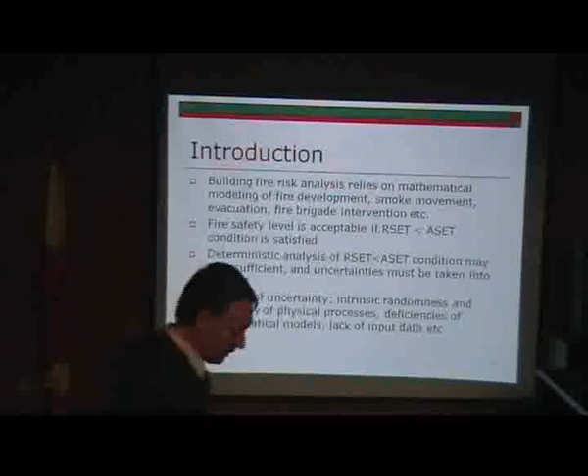...is less than the available safe egress time. That is the time before the exits will be blocked by, say, toxic products or high temperature or things like this. So this condition, RSET less than ASET,

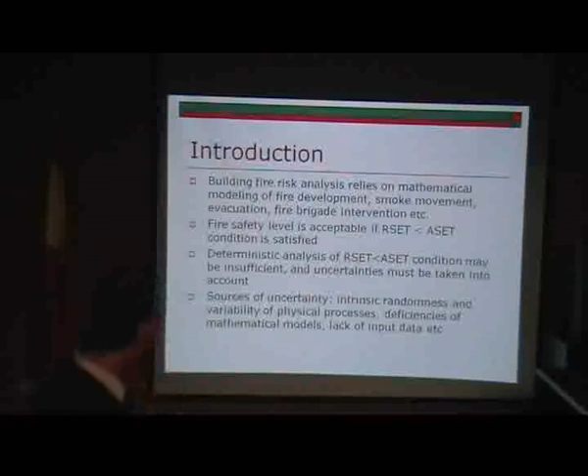is a general condition, and I'll say a couple of words about motivation for this research. All the world now is moving from prescriptive rules or codes for buildings in terms of fire safety to performance-based design, which is a design of buildings based on their performance in fire conditions.

And Russia, well, with some delay, starts to catch up, also introducing new laws which make building designers prove that the building they're designing is okay in terms of this condition. But it's a very inertial process of making people think differently.

And the question which we often ask is, okay, you show this in one particular situation, which you consider as the worst case scenario, but what happens if the situation changes, if you have a different fire source or different geometry and things like this? So, as a first step of all uncertainty analysis, we need a sensitivity analysis.

And I've done this with the CFAST model for different situations. I thought it would maybe be of general interest to see how different parameters affect the result we obtain.

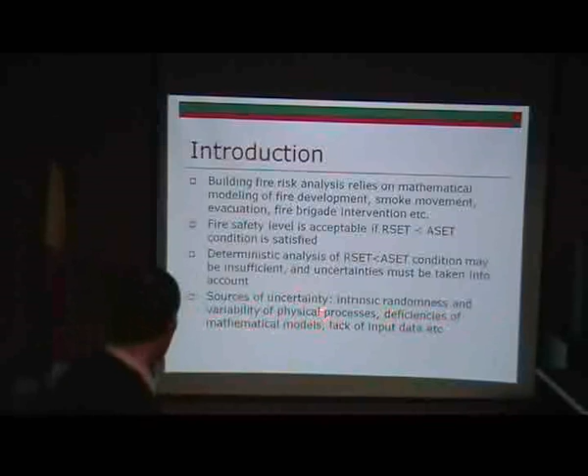We can perform deterministic analysis of this condition, but this can be insufficient, and uncertainties in the determination of the time that people are evacuating and the time available before untenable conditions are reached in a compartment should be supplemented by the analysis of all uncertainties. The sources of such uncertainties are intrinsic randomness and variability in physical processes. Fire is a random event. Then deficiencies in our mathematical models, lack of input data, and so on.

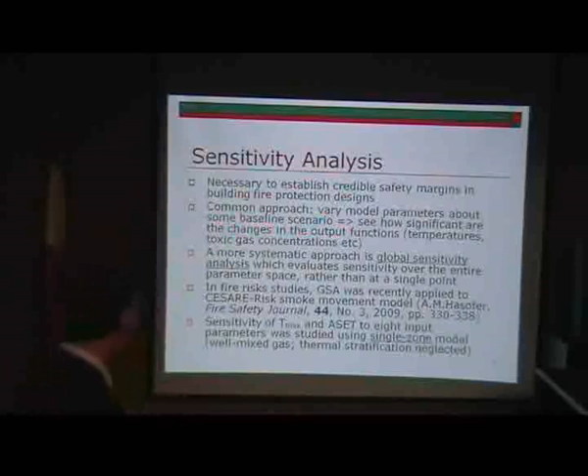So uncertainty analysis is necessary to establish some credible safety margins, and sensitivity analysis is its part. The common approach is we vary several model parameters about some baseline scenario and see how significant the changes in the output functions are. And these output functions can be, for fire modeling, temperatures, toxic gas concentration, any parameter actually.

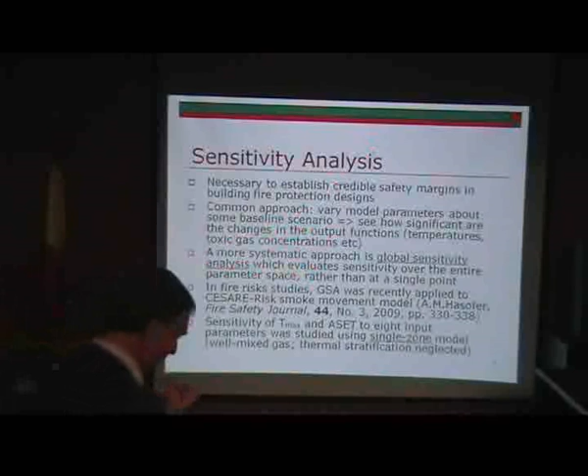A more systematic approach, however, is not to make small variations about some baseline scenario, but to apply modern approaches called global sensitivity analysis, which evaluates sensitivity not with respect to some baseline scenario, but over the entire parameter space.

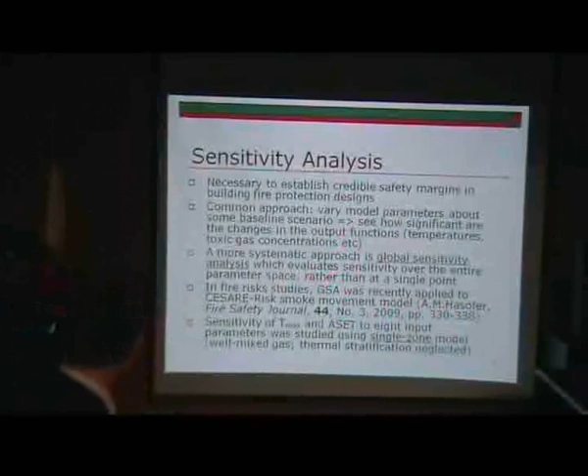In fire-risk studies, the only work on global sensitivity analysis, known to me at least, is a recent work by Hasofer, published in Fire Safety Journal, where they applied approaches very similar to what will be presented here to CESARE-Risk. This is a smoke movement model developed by them.

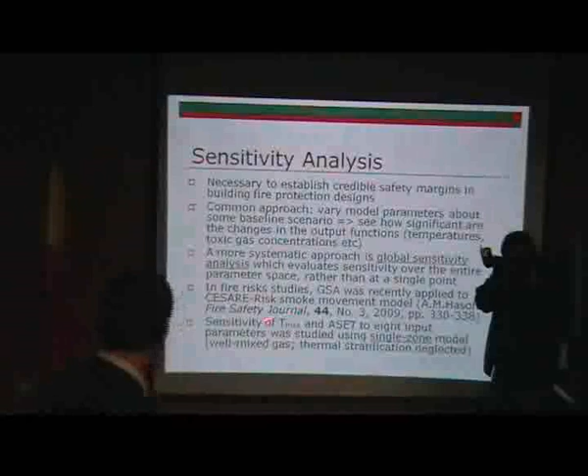In their work, they studied sensitivity of the maximum temperature in the upper layer and the available safe egress time to 8 input parameters using a single zone model. Again, the same questions which were asked in the previous presentation apply here.

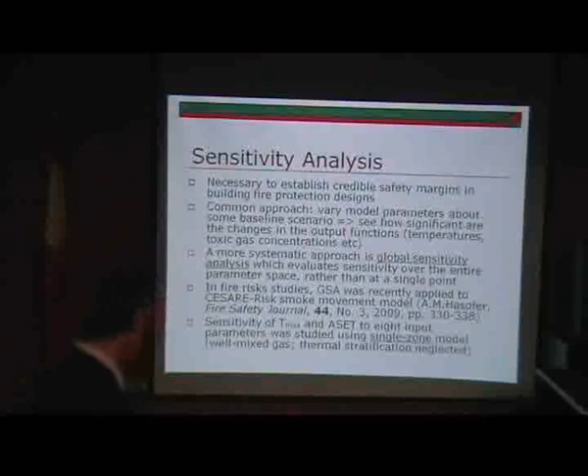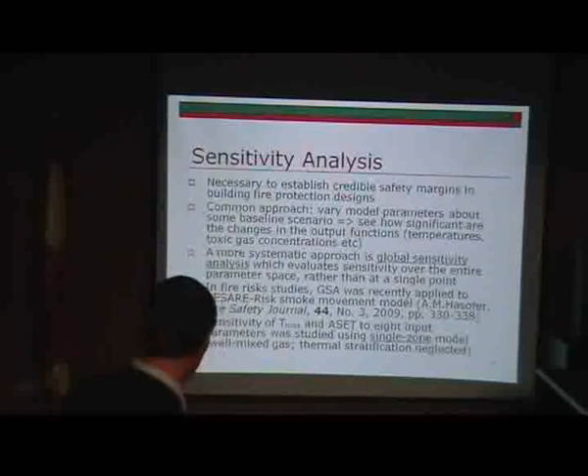When we have short times and people are evacuating, it's normally conditions with very strong stratification and two layers. So the objectives are to carry out this global sensitivity analysis based on a two-zone model. Another thing we wanted to see is how this works with multiple rooms. Our geometry is moderately complex. It's either a single room or 3 rooms connected with a long corridor.

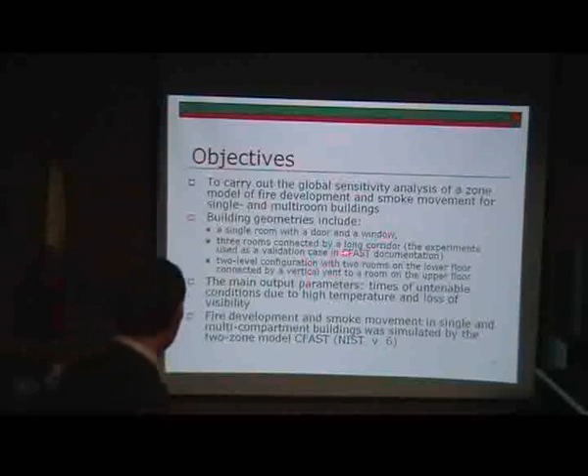This is one of the cases included in the CFAST documentation, and the experiments are available for this. And finally, a 2-level configuration in which 2 rooms on the lower floor are connected by a vertical vent to a room upstairs. The main output parameters are directly related to ASET.

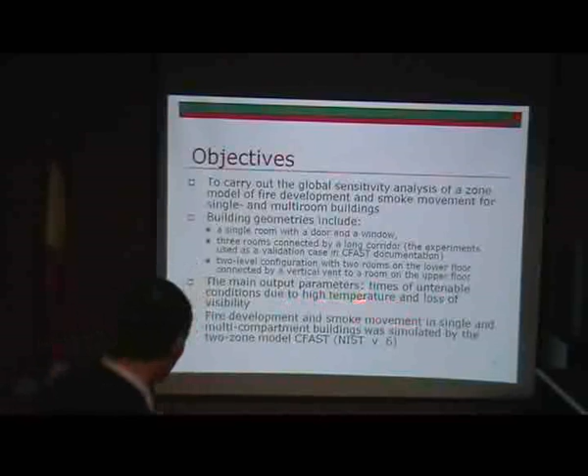This is the time of untenable conditions due to high temperature, when the temperature at a given height reaches some value considered as a danger threshold, and loss of visibility, which also affects people trying to evacuate.

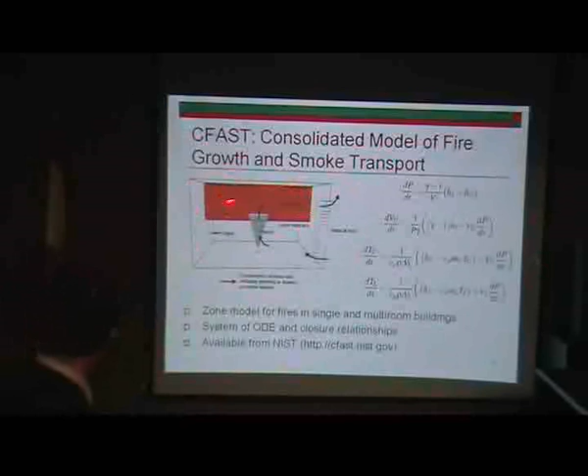As the fire model, we used the well-known CFAST model developed at NIST, version 6. I think this model is well established now. This is the picture taken from their manual. We have 2 layers. The upper layer is a hot layer, the lower layer is a cold layer. We have an opening and the flow into the compartment and out of it.

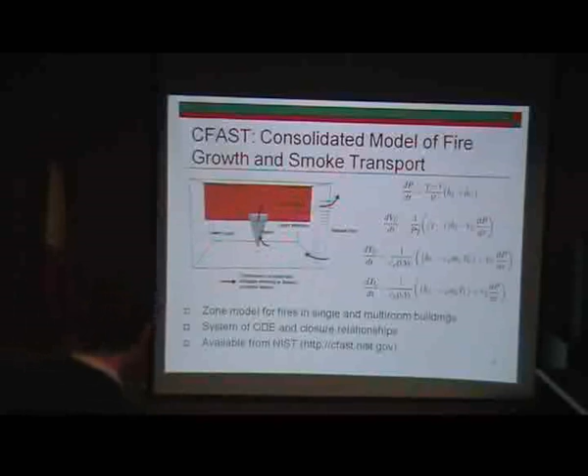And these 2 layers are connected by a fire plume, which transports the energy and smoke products from the source and the entrained air into the upper layer. All this is described by a system of equations, from which we can find all parameters like temperature or composition of the lower and upper layers, plus the interface height. We can see how the upper layer grows. So this is a deterministic model where we put in some input parameters and get some results.

To make a sensitivity analysis, we run CFAST under the Dakota toolkit, which is the software package developed at Sandia National Laboratories. It's a general purpose engineering package for sensitivity analysis, uncertainty quantification, things like this. So we run CFAST as an external solver to Dakota. Dakota generates stochastic input data for our parameters.

Then CFAST calculates each scenario, generating the outputs, the times of untenable conditions due to high temperature and due to visibility. Then we feed this output back into Dakota for statistical analysis. That's how it works. So we choose parameters and their variation ranges, and then run this repeatedly until we have enough samples.

Okay, so now to more specific things. Analysis. We tried 2 things which are included in Dakota and considered modern global sensitivity analysis. First is the fast screening tool, the so-called Morris method, where our output depends on several inputs, and we perturb each input by some delta and calculate the difference. In this case, we obtain the difference in our outputs due to the difference in one particular parameter. This is the one-at-a-time, or Morris, method.

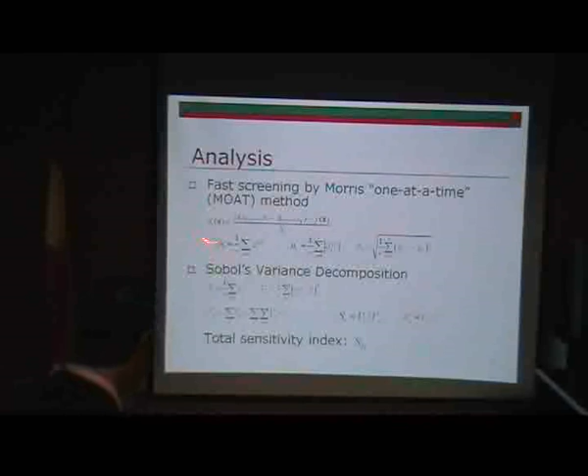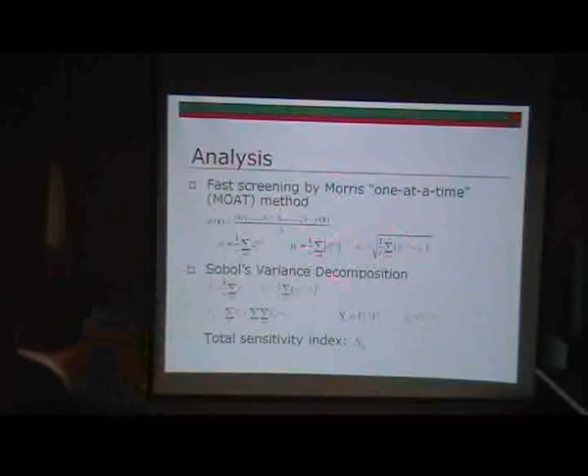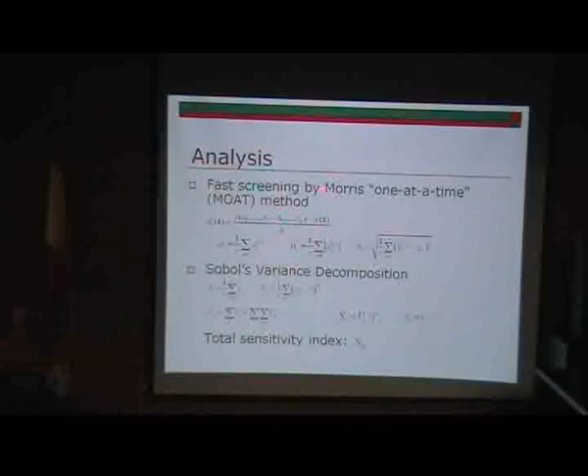But this is not supposed to be a derivative, in the sense that these deltas are not considered small values. And then we calculate this function at a number of points. I designates the point, and then we can find the average, or modified average, which takes the absolute value, and then we can calculate the standard deviation. What's the sense of this? The higher the mu or mu star values, the more sensitive our problem is to a particular parameter. And this summing up over the whole...